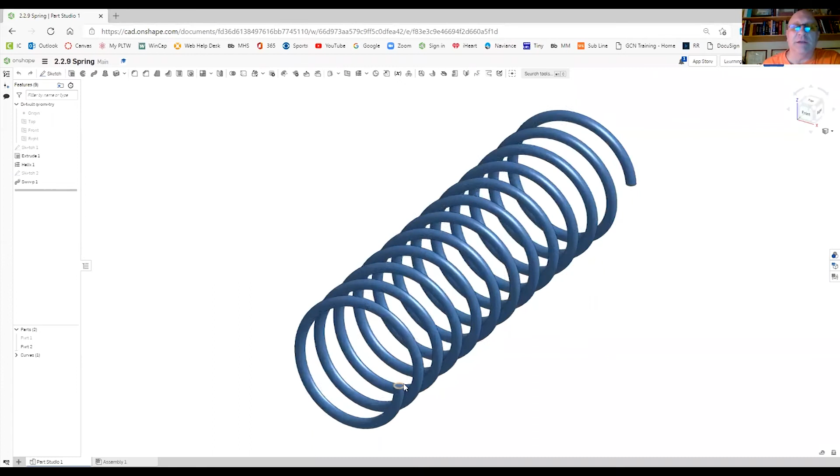So there are 4 dimensions, or 4 measurements, that you're going to need. The first one is the thickness of your wire, this diameter right here. That'll be your first number. The second one is the diameter of the whole spring, from edge over here to edge over here.

The third number you're going to need is the overall length, from tip to tip. And you're going to need one more number, and that's how many times this spring revolves around.

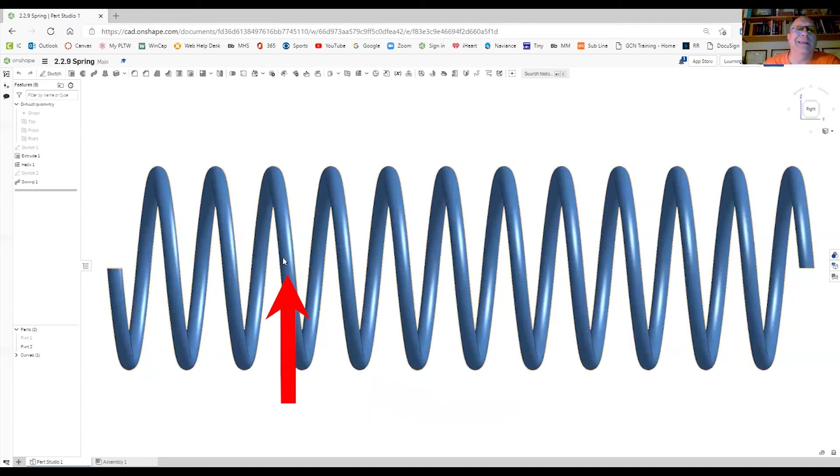So what I'm going to do is start right here at the right side on the edge, and just go right across. Every time I hit it, I'm going to count as 1. So there's 1, 2, 3, 4, 5, 6, 7, 8, 9, 10, 11, 12. So this spring spins around 12 times.

All right, so let's get started. I'm going to go to Onshape. I'm going to create a new document, and I'm just going to call this spring.

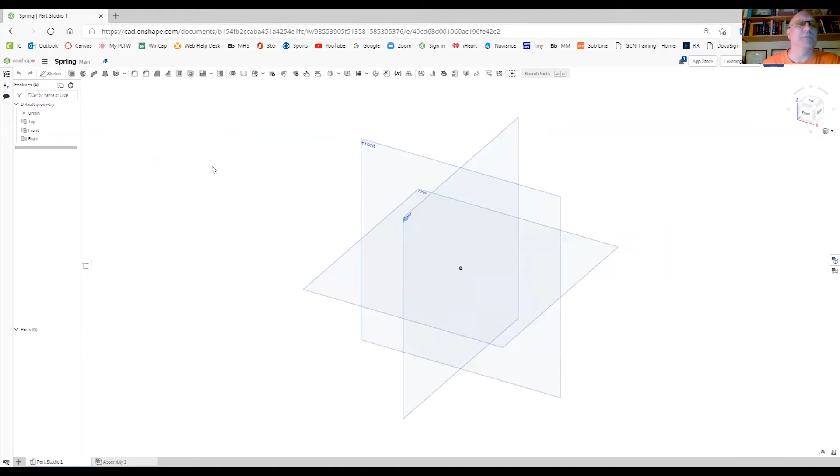I'm going to turn off my right and top plane. I'm going to put a new sketch right on my front plane and look right at it. The first thing is I need to create a cylinder that I can wrap this helix around. So I'm going to make a circle, starting right at my origin.

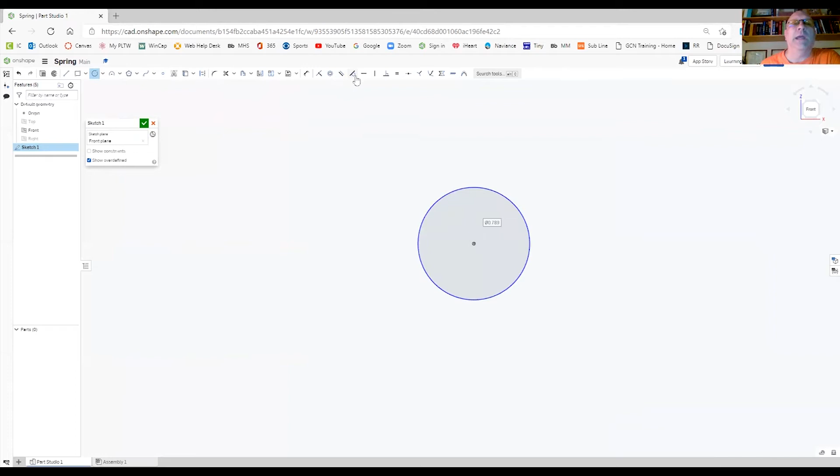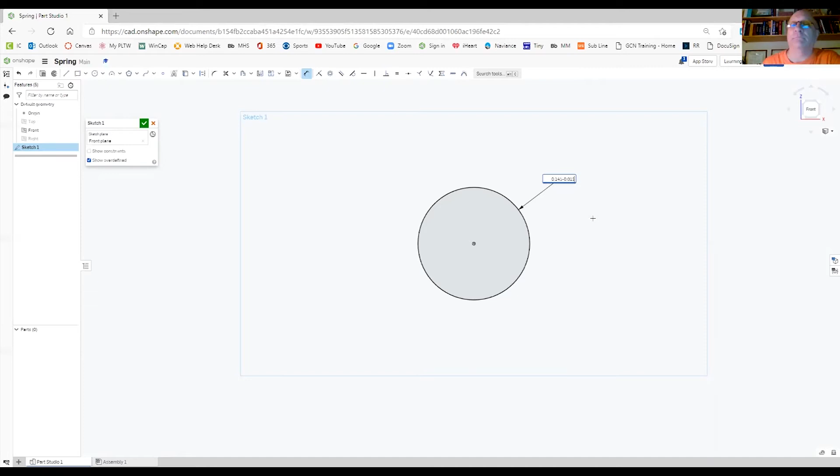And the dimension I'm going to put in is going to be 2 of them. I'm going to put in my overall diameter, however wide I said that spring was, so I'm going to use 0.145. I'm going to subtract out the thickness of my wire, so I'll hit the minus sign and let the computer do the work: 0.013, that was the thickness of my wire. Hit enter, and there is the diameter of the cylinder I need.

So I'm just going to finish this sketch, get into my isometric view, and zoom in a little bit. We're going to extrude that circle, pushing it back the other way. My distance is going to be however long I thought my spring was, whatever I measured. I'm going to say mine was 0.536.

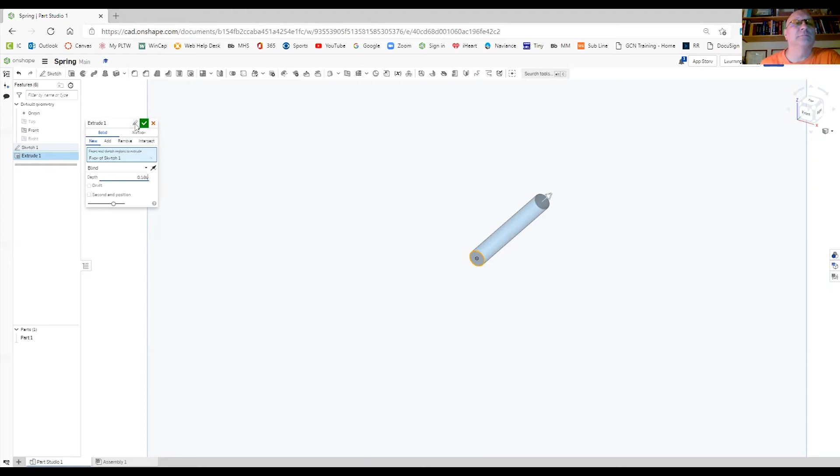So there's my starting cylinder, and that's what I'm going to wrap my spring around. You need something to wrap your spring around. So what I want to do is create my spring, or my helix.

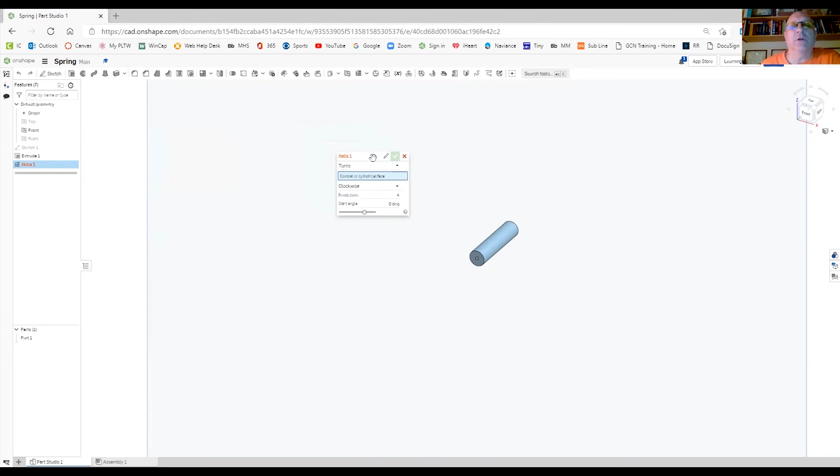So right up on top, you'll see that little spring symbol. If I hit that down arrow, you'll see where it says helix. So I'm going to select helix. The first thing it says, if I bring my box a little closer so you can see, is conical or cylindrical face. So I'm going to select the face.

Next it's asking me clockwise or counterclockwise. Well, most everything goes clockwise, so I'm going to leave it clockwise. And for revolutions, I'm going to type in 12 because that's what I had on the other one. I'll hit my green check, and you can kind of see it's bouncing around here.

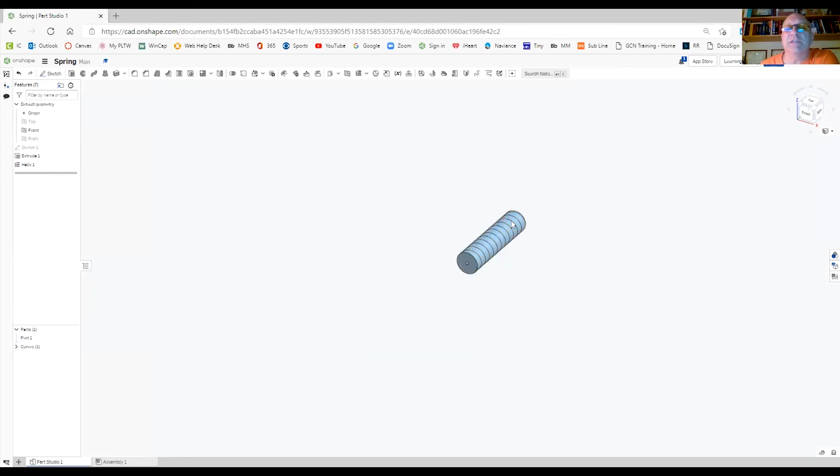The next thing is I want to hide that cylinder. So I'm going to come down in the bottom left-hand corner where my parts are, and you'll see part 1. I'm not going to delete it, I'm just going to turn the visibility off so I can just see that helix.

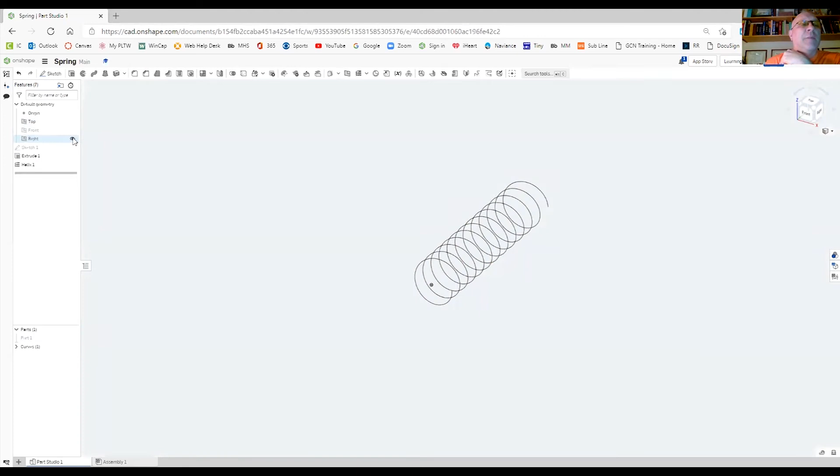I want to go back and turn on my other planes. So I'm going to turn on my top, turn off my front, and turn on my right side plane. All right, and then I'm going to zoom out.

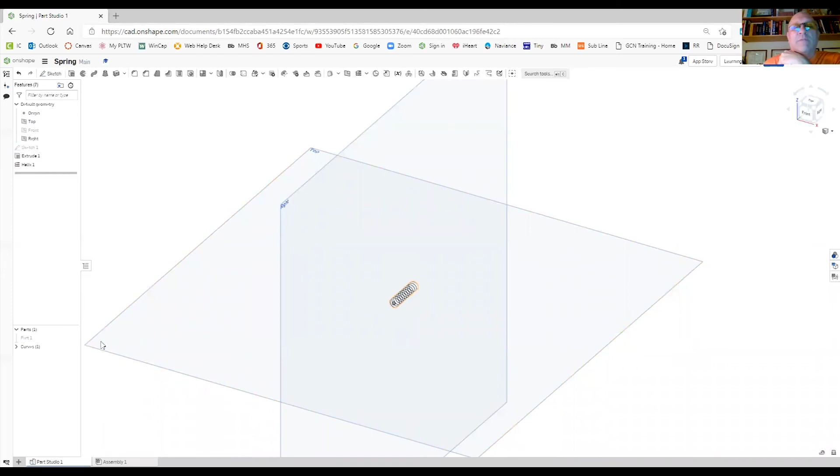I want the plane that's going to be where this little knob, this little endpoint, is sitting on, either this one or this one. So that's going to be this plane right here, my top plane. So my right plane, I'm going to make that one invisible. Let me go back and make that invisible. And this little knob is sitting right on that plane.

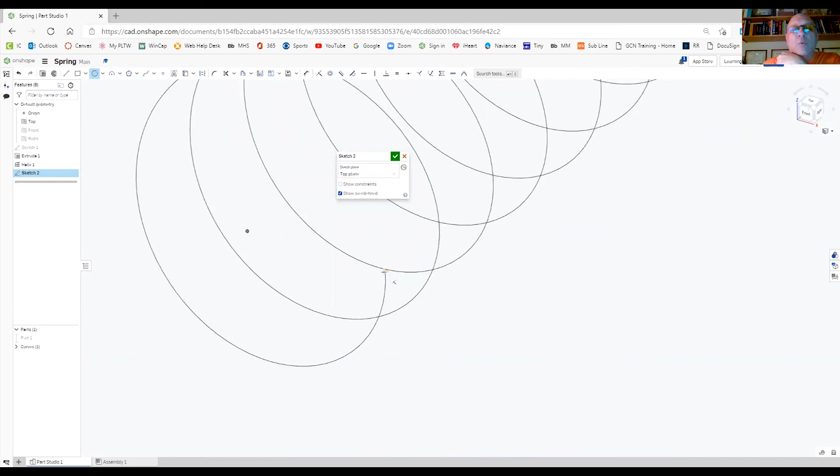So what I want to do is put a new sketch on this plane. There we go. And what I'm going to do is draw a circle right on the end of that helix. Let's zoom in so you can see where I'm grabbing, right on that little endpoint. There we go, and I'm going to dimension that.

And that is going to be the thickness of my wire. So as I said before, 0.013 is what I used before. Okay, so there it is.

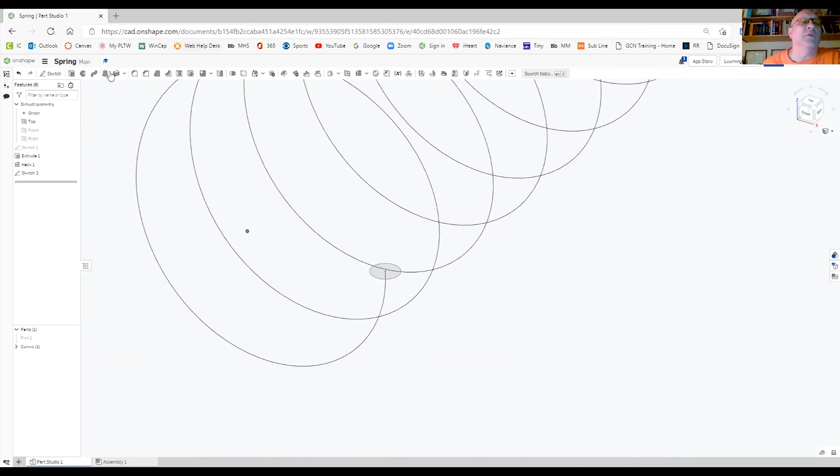Now what I'm also going to do is go back and finish this sketch, and we're going to use the sweep command, which we used before. So I'm going to go up here where it says sweep, and it's asking for the face of my sketch, so there's my face, that little circle I had. It's asking for my sweep path, so let's click on that.

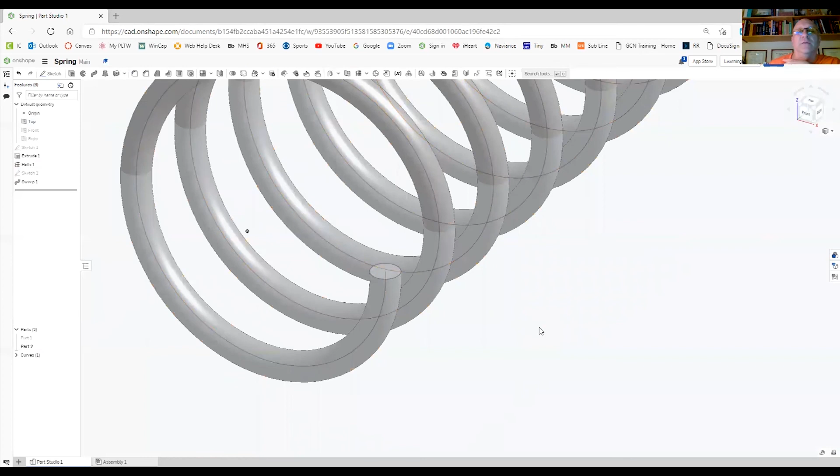And I'm going to select this helix. Now this will take a couple seconds, as you can see it's generating. And there it is. All right, let's zoom out a little bit, and you'll be able to see there's my spring, and that's how I created it. I'll just turn off my top plane and my origin so you can see it. And that's how you create a spring.